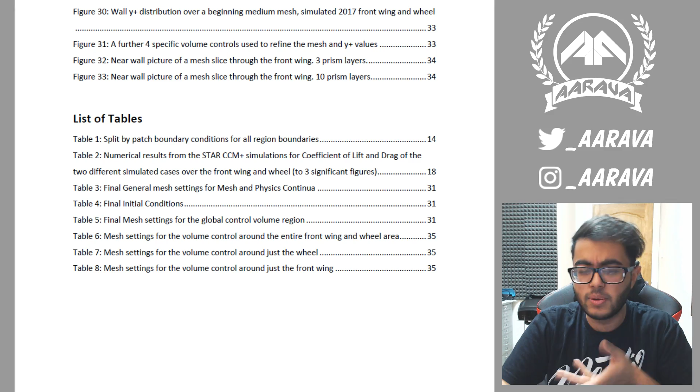The actual full literature review ended up being like 14 pages, which was its own separate document I had to hand in, I think last year, 2016, in November. So it was a very early hand-in for the literature review to be separate, and then this was handed in April 2017, which was an awesome month.

It was a big relief to hand it in, like print it off, 2 copies printed off, hand it in, there you go, bish bash bosh, the entire year kind of basically dusted off, apart from the exams, obviously.

But so the abstract just kind of sets out what the project was going to entail. So I said it was on Formula One. It didn't really actually specify what it was about. So basically, my project was on the 2017 aerodynamic regulations.

I wanted to compare the 2017 regulations to the 2016 one, because there was a lot of debate before this season kicked off, way back in January 2017, even in 2016, about the dirty air that this would cause. The new aero, it's going to be a nightmare for cars to follow, and to an extent, at some tracks it has been apparent, especially in the first race it was very apparent, but it's kind of leveled out and been okay in terms of dirty air.

But I wanted to compare that and see what was going on. Initially I wanted to look at the entire car, but then my supervisor, who was assigned to me for the entire year, said that was way too ambitious for a third-year degree, so he suggested I just look at one part of the car.

So I looked around, thought about maybe the rear end, maybe the side pod areas. In the end, I went for the front end, because the front end of these F1 cars now is so complex, so important for the rest of the car - anything that happens at the front goes towards the back. So I thought I would look at the front end and basically the interaction between the front wing and the tyres.

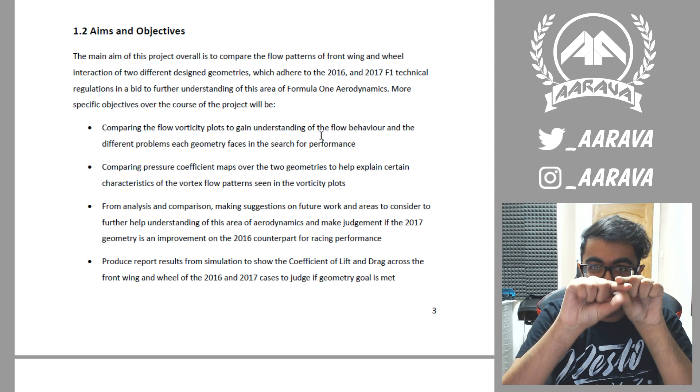There's just not a lot of research in terms of concrete journals about modern F1 cars. There's plenty about older spec F1 cars, like single element, literally plank-of-wood wings, but not a lot about the new rocket ship cars we've had for the last 10 years or so.

So aims and objectives, just setting out what I wanted to do. As I mentioned, comparing flow vorticity plots to gain an understanding of the flow behavior and the different problems each geometry faced. The geometries were a generic 2016 car and a generic 2017 car.

Those I purchased off a CAD website, designed by the same guy, giving him credit in the acknowledgement, and it was under fair use in terms of I'm using it for educational purposes.

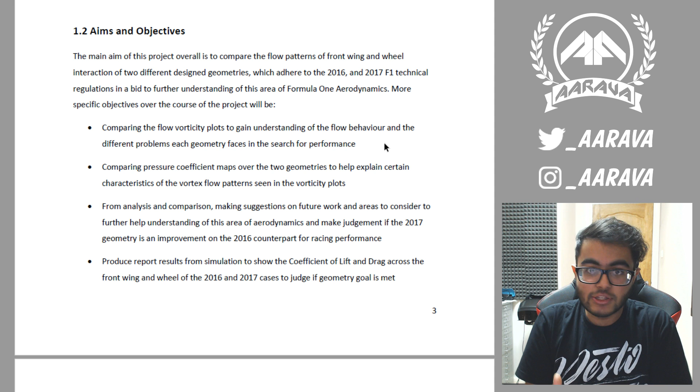So yeah, having the same designer make generic models for 2016 and 2017 gave me the best crossover of, okay, there's not too much outside design difference. It's the same designer, so in theory he should be designing it the same sort of way, so it was the best way to work in that aspect.

So generic geometries there - I think they're based very heavily off the FIA official videos that they gave.

It was the one available at my university. They have a mega kind of cluster computer hooked up to StarCCM, so that's why I chose that program compared to maybe other programs you might see other unis use or any other papers.

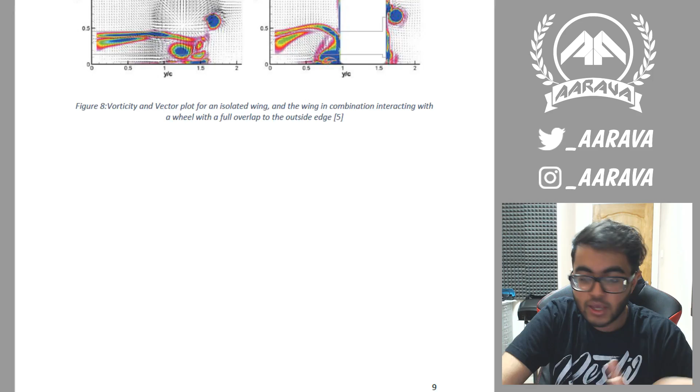So yeah, the introduction was just saying that, aims and objectives, as I was saying - flow vorticity, basically the plots, seeing where the air is swirling around, comparing the pressure coefficient maps over the two geometries to help explain certain aspects of the vortex.

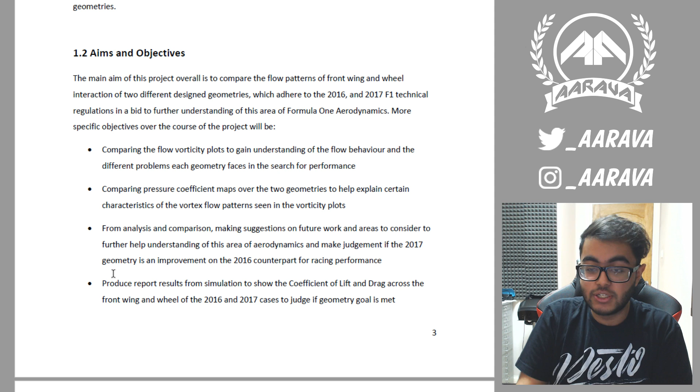So the pressure across the geometries can basically help explain and back up what we're seeing for the flow vortexes. Obviously the pressure is governing the physics of it, so that can help go in tandem with the vortex flow charts to help explain that.

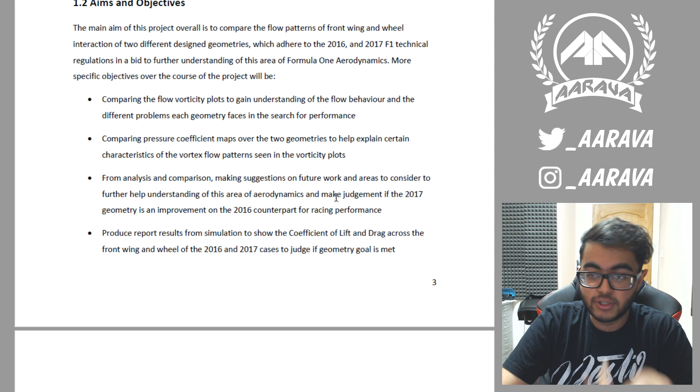And then these last two points are basically what I was mentioning about the conclusion: from analysis and comparison, make suggestions on future work and areas to consider to help further understanding of this area of aerodynamics, and then produce report results from simulations to show the coefficient of lift and drag.

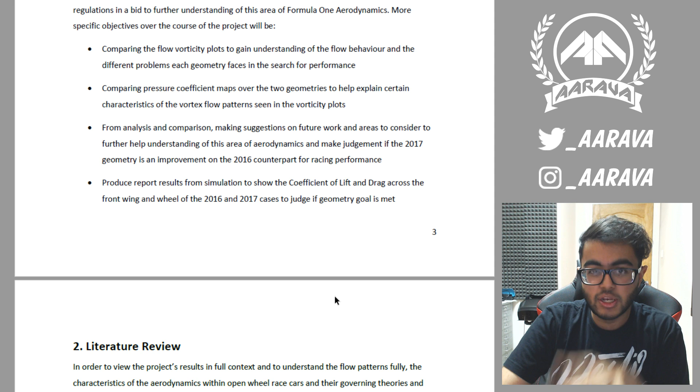So this was the smaller one, that's why it's the fourth point. Basically just a few numbers to compare coefficient of lift and drag. That was less important because the numbers won't matter too much, since it's obviously a third year report with two generic geometries. The numbers aren't going to be entirely accurate, whereas the actual pattern of the flow in the simulation may be pretty accurate, so that's why that's a smaller fourth point.

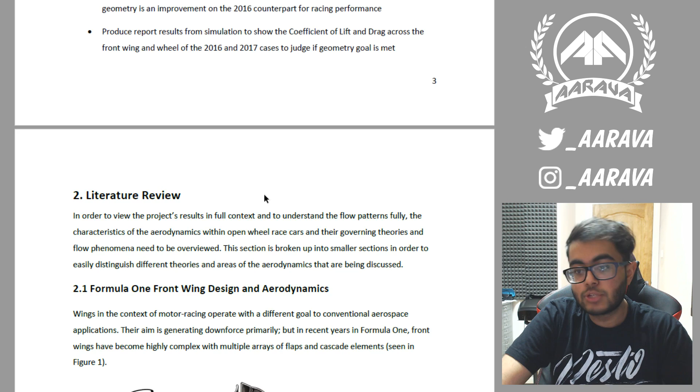So we go into the literature review. As I said, there is a bigger one that I did.

Right, so we're getting into the actual meat of the report, so I'm going to try my best to slow down the talk. I know I can talk quite fast. I'm not going to go into immense detail with everything because I just don't want the video to be too long and strung out.

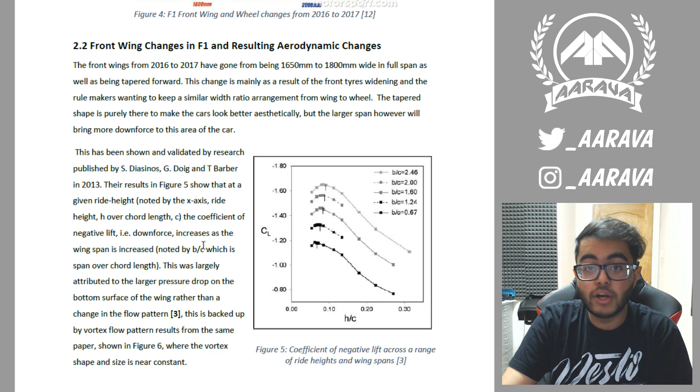So I'm going to rattle through this a little bit faster. We go through front wing changes in terms of just the span of the wing - obviously the wings got wider in 2017. So I wanted to look at a very base level what happens when you increase wings on race cars, showing that previous research has shown that if you increase the span, you are going to get more downforce.

The vortex itself, though, doesn't really change too much. You can see going from a shorter span to a longer span, the pattern hasn't changed too much. All that's kind of changed is this main vortex is elongated a little bit, stretched over. You can see the bleeding off of the vortex on the inside - this is the middle part of the wing, and this is the end plate. So moving to the inside, the bleeding off effect is a little bit longer, but apart from that, the actual shape itself is the same.

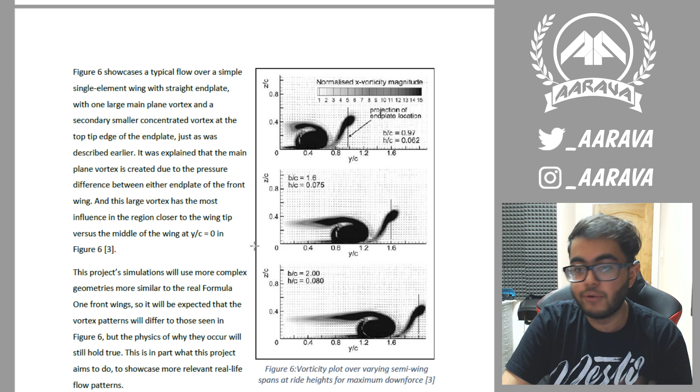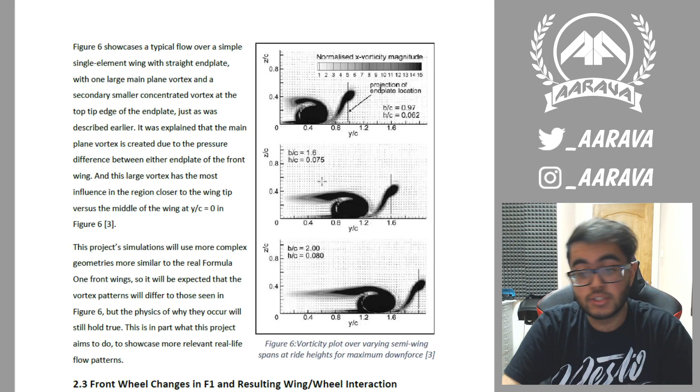But in terms of the actual data for the negative lift, the downforce you're creating, you would assume anyway that it would create more downforce, and it does - the research backs that up. So that was the wingspan section. You can see I've broken it up into F1 aerodynamics in general, and wingspan changes.

Then we go on to the actual interactions between wings and wheels. There's quite a bit of more recent research from 2012, 2013, 2014 into these interaction points. But again, through the literature review, you can see it's just a simple wing - this is the end plate here, then the wing, then the tire, very, very simple. But for a literature review, it was good because it gave a fundamental understanding and allowed me to show off that understanding before doing my own research and CFD simulations.

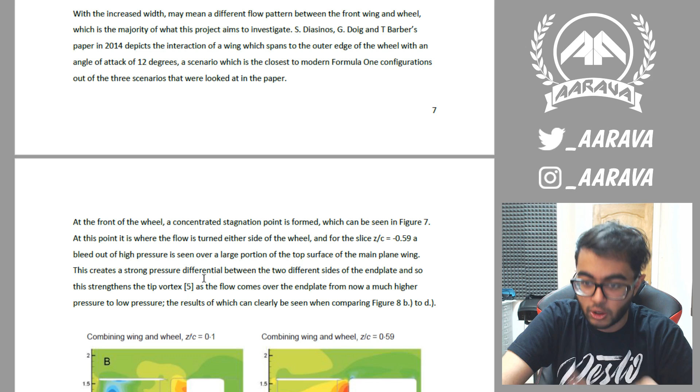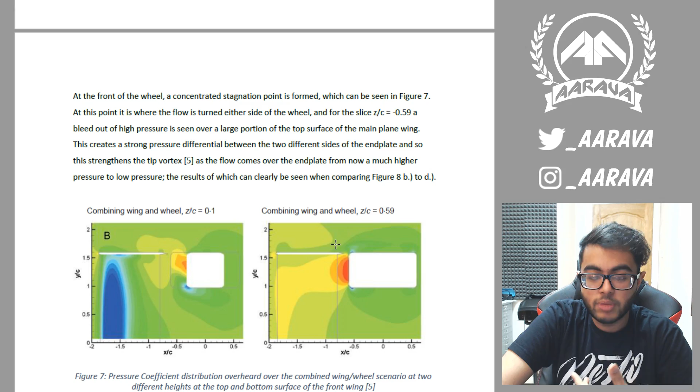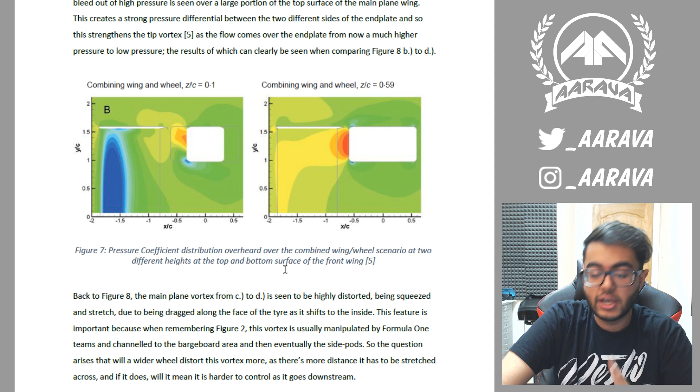So looking at the interactions and explaining those, these are basically the vortex plots that I'll be looking to reproduce later in this report. And this is the pressure coefficient plot, which I'll be looking to reproduce with my own data. These two were huge templates for me in terms of what I wanted to present - a good way to show, okay, I think this is the best way to present my data when I do it.

In terms of these simpler wheel-to-wing interactions, the main talking points: concentrated stagnation point at the front of the tire, and what that enables is a bleed over of higher pressure onto the actual wing. What that creates is a higher pressure differential between the inside of the end plate and the outside of the end plate. You can see here the difference - the darker green and lighter green is the difference in pressure, and because there's higher pressure now on the inside compared to the outside, the air will go from high to low pressure, and you can hopefully picture it in 3D terms.

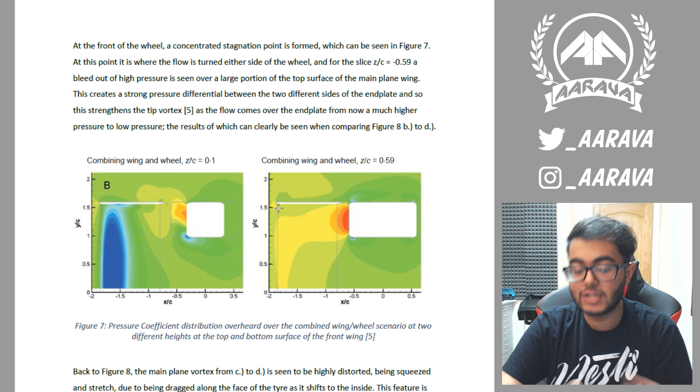High pressure here, low pressure here, the air is going to spiral over the end plate, and that's going to create an even stronger tip vortex going across. So that's how the wheel interaction will actually help the wing, in a sense.

Looking at the vorticity plots here, you can see this is the main kind of vortex, and you have this end plate vortex, which is going to get strengthened. You can see the difference when you go from this one to this one, the combined wing and wheel, compared to the isolated wing downstream - the vortex has grown larger.

It's a lot more rigid, more circular, more structured. So actually the wheel is helping that vortex be structured as it goes downstream, you would imagine, down towards the side pod basically.

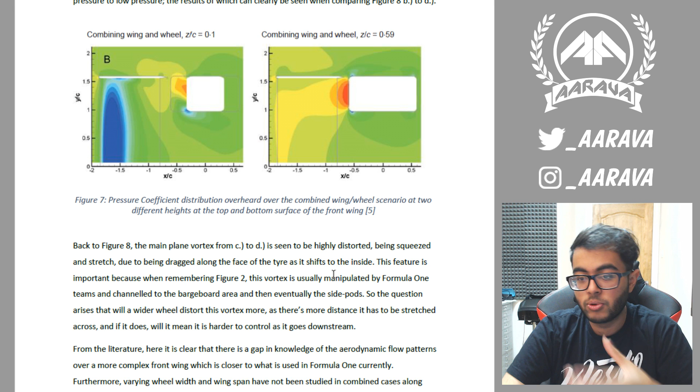And then the inside one gets shed a little bit. You can see it gets warped and kind of stretched from this cleaner inside vortex. So that's also one part that I pointed out I wanted to look at for my research.

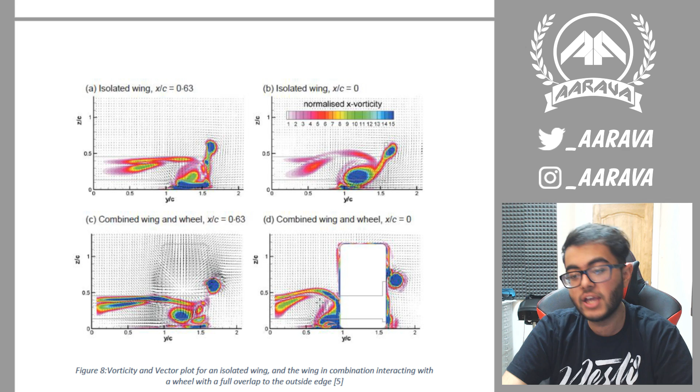In F1 that's going to get manipulated, just like we mentioned with the Mark Webber picture - that vortex is going to get manipulated. So the fact that it gets shed a little bit and warped in these simpler cases is a topic of interest.

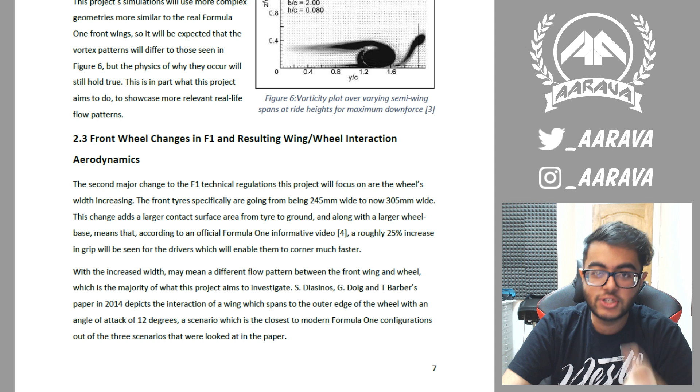Throughout the literature review, whilst you're reviewing the literature, the entire time you're basically going after every sentence: this is why I want to do some research about it, or this is what I'm gonna look at, or this is why it's a point of interest and why I'll be looking at it. So you're basically just justifying why you're doing the work you're going to do.

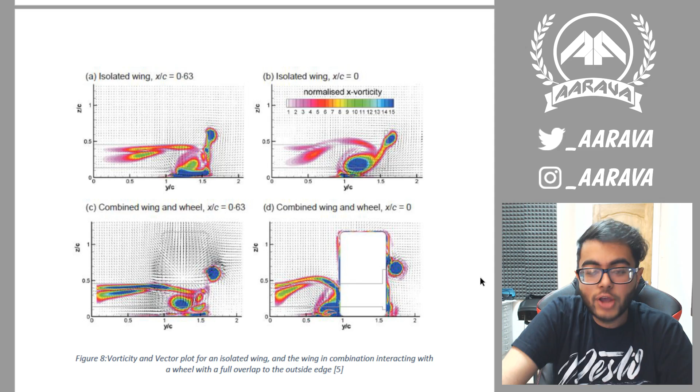If you don't have enough justification, it's kind of a weaker report, because then it's a way for the lecturer to question why you did this, what the point of it was. So you're just trying to suss that out.

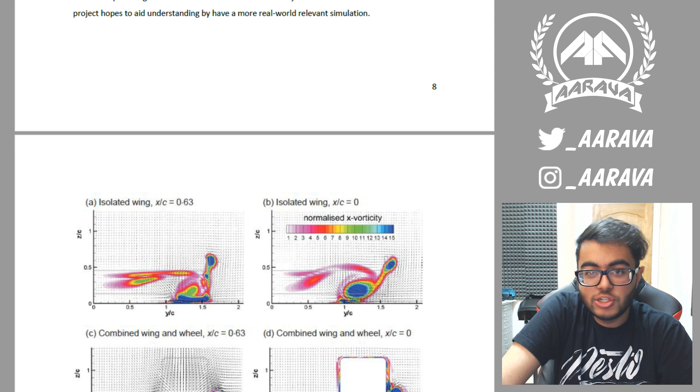For me, this topic was very good because, as I mentioned, there's not that much relevant research into modern F1 aero because it's all very secretive these days, and I guess a lot of people just aren't very interested in it. Across the entire UK, there's not a lot of very recent modern F1 scientific journals or reports out there.

So the entire time it was very easy to keep on saying, yes, we've got a simpler term, but what's going to happen on the more complex stuff?

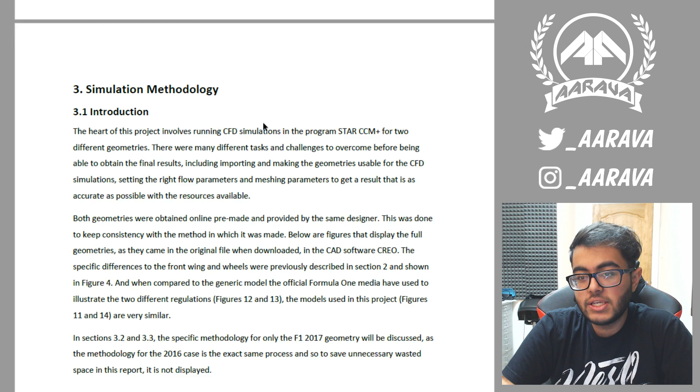So then we move on to the simulation methodology. This was basically just explaining how I was going to go about everything. As I said, this is the kind of generic geometry.

I opened it up into Creo, which is a CAD software, and then I'd splice it and cut it up and remove the suspension arms. I would remove the entire rear end - you can see it's just become a bluff body because I'm not interested in that.

All I'm interested in pretty much is this front wing to wheel interaction. After the wheel, I pretty much don't care about it because that's out of my jurisdiction - not something I'm going to look at because it's just too complicated for one individual project.

So just simplifying the geometry in Creo, opening up in StarCCM, which is the CFD software I've used. In StarCCM, and pretty much any CFD software, you create basically a control volume.

The control volume is basically like a virtual wind tunnel. You create an inlet, you create an outlet, you create walls, and you do a symmetry wall down the middle, because what you do actually to save computational time - these CFD simulations take a lot of number crunching.

You have to actually have a very good PC for it. And actually, in the end, the funny thing was, I did most of my simulations on this PC that I'm running this video on - my gaming PC, the one I use to game on, the one I use to do video editing on.

I did most of my simulations on this PC because it's a 6-core i7 processor, 32 gigabytes of RAM. So compared to your average student, the PC is very decent.

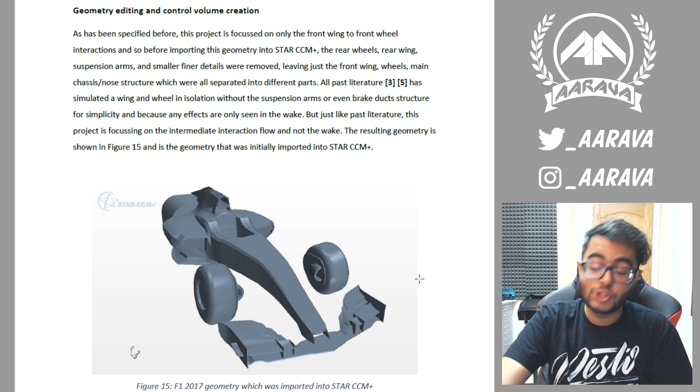So I actually did most of my simulations on my gaming PC. Who knew? Having a gaming PC and doing YouTube actually came in handy for the simulations, because I ended up running it mostly on my PC. It would take about 8 hours maybe on my PC, which is not too bad. I'd set it off and then just go relax, basically. But yeah, so to save computational power, that was the point I was on.

To save computational power, you do half the car and basically have a symmetrical line. So the line of symmetry runs down the entire half of the car, that's the nose, and you do a symmetry line down the middle through the entire car. To save computational power, because then in STAR CCM+ you can just flip the results and mirror them, so you've got a whole car worth of results, but you've only done half the work.

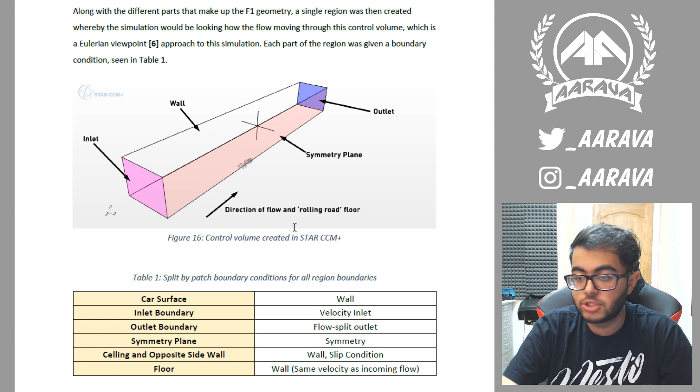So that's a good way to set up the control volume. You've got the direction of flow, rolling road simulation as well. So in terms of the car surface, I set that up as a wall. Obviously an inlet boundary, so the inlet is a velocity inlet, the outlet is a flow split outlet, and the symmetry is the symmetry plane there.

Then you've got the ceiling and the opposite wall, and those have a slip condition. So effectively that means the air is not going to get affected, it's not a boundary layer being created at that wall. So it's as if the wall is not there, but it is there, because we need to save computational power. We can't just simulate everything, the infinite air, so you have that control volume there, but you set it as a slip condition so it doesn't get affected.

And then the floor is a wall like the car surface with a boundary layer, but also at the same time we have the same velocity as the incoming flow to simulate a rolling road, because I don't want to simulate the car static, I need to simulate it moving. So instead of having the car move, I have the wall move, because that's the same thing in the simulation and in pretty much the entirety of engineering. You always look at the object as static, and you always just look at the air moving towards the object. So just like with the air at the inlet moving towards the car, you have the road moving this way.

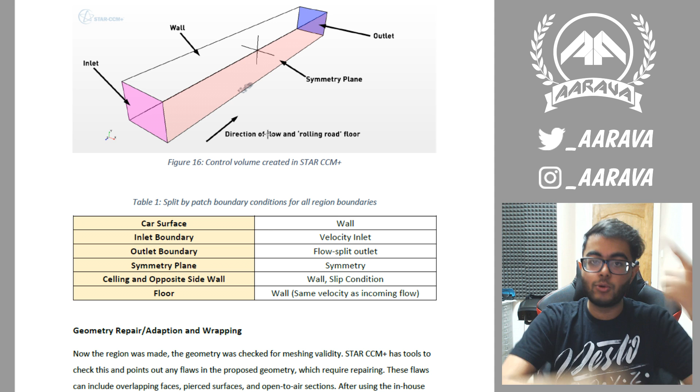And the same thing with the tires - I would set those up basically in the geometry. I could pinpoint the individual tire and tell the software, okay, I want the tire rotating backwards like this to simulate the tire moving across as it's driving. And that would also be at the same velocity as the air and the road.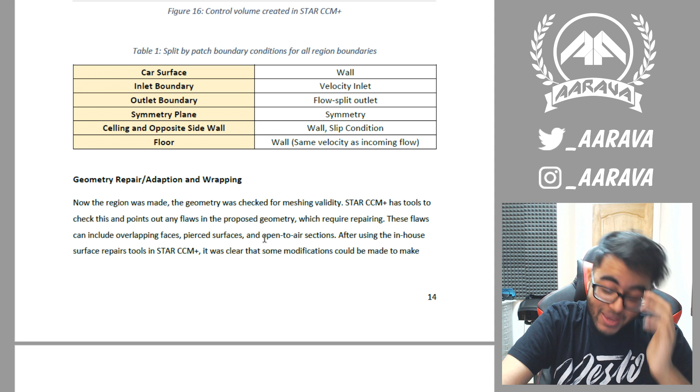So it wasn't as simple as just buying the geometry, opening it up in Creo, simplifying it, and putting it into StarCCM, and that was it. It just worked like magic. There were countless hours of repairing this geometry, adapting it, and then surface wrapping it, to try and get it as smooth as possible. The guy who designed it did a fabulous job, but at the end of the day it wasn't completely airtight as the simulation needed, and the more airtight and error-free you can get the geometry, the better for the simulation.

And then eventually you surface wrap it and surface mesh it. The best way I can explain it is like vacuum packing—you have the warm acrylic, you stamp it up over the object, then vacuum seal it and it creates a shape. That's basically what you're doing here. You're surface wrapping the entire car and creating a surface mesh from the geometry, and then on that surface mesh is where you create the volume mesh, which is the entire 3D mesh the simulation uses.

This was actually a large part of the project. Over the entire year, I'd say about 60%, or at least 50%, of the work was just getting the meshing and the numerical model all fine and how I wanted it. Especially the mesh had to be as good as possible.

The better mesh you have, the more accurate a mesh you have, the more accurate results you're going to have. Obviously there are limitations—it's a student third-year project, so that's something I brought up at the end of the conclusion as well, which is another big thing about these engineering reports: the entire time you also talk about errors and how you can improve it. It was a case of, yeah, this is accurate to a certain point. I'd like to, in hindsight, get it more accurate, but I don't have enough time. This is a third-year project, so I have to just accept the results as they are, and accept the mesh like this.

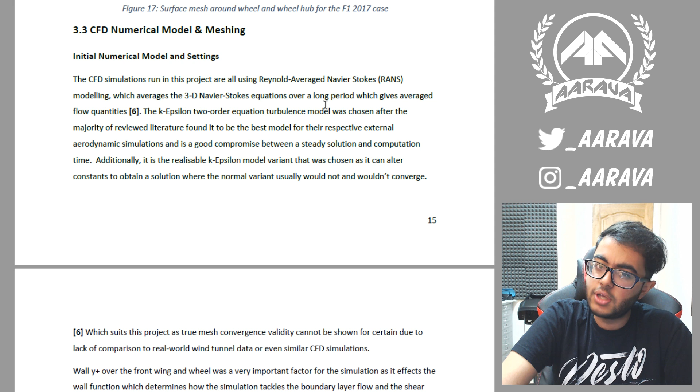In first year there were introductions to it in fluids lectures. In the CFD software, you just tick different boxes: okay, I want to use Reynolds-averaged Navier-Stokes equation modeling, which averages all the equations across a long amount of time, and then the 3D version of it, since we're looking at a 3D space, not 2D. The actual turbulence model itself is a K epsilon 2-order equation. Obviously you need a turbulence equation because this is not a smooth flow, it's a turbulent flow.

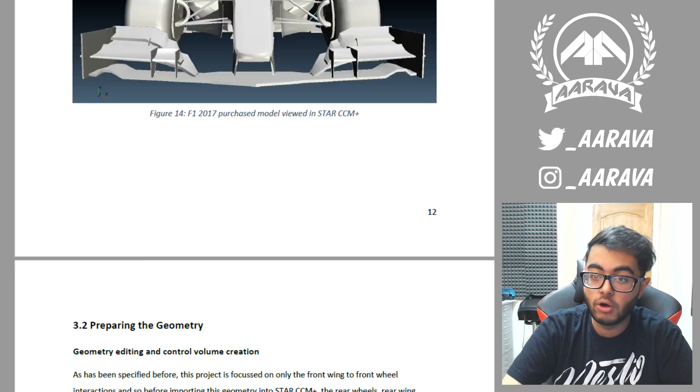There were other turbulence models my supervisor was suggesting. In the end, having looked at all my literature review stuff, I went with the K epsilon model because a lot of the more recent papers all use it, and it seemed to be the most accurate and the least fiddly, and also saved computational time, because it ended up being a good compromise between a steady solution and the time it saved for computation.

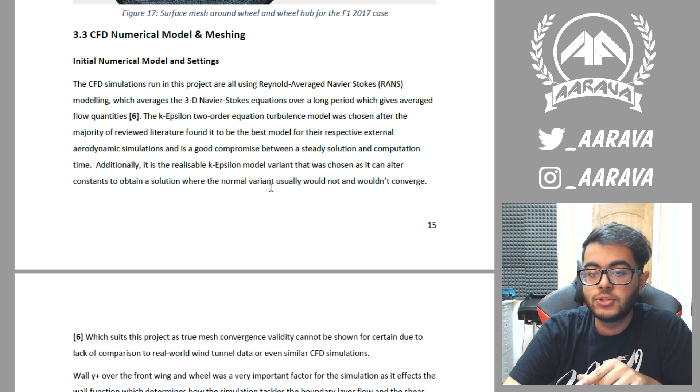Specifically, I was using something called the realizable K epsilon model variant, which was chosen to alter constants to obtain a solution where the normal variant could not. So when the software and the normal model can't figure out a solution for, say, a certain point on the mesh, it'll basically alter some of the constants and change some of the governing physics constants to obtain a result.

So it's like padding—it smooths it out. Instead of having a very jagged result, it tries to pad it out and smooth it. Basically it's a form of bodging a little bit, but it's a good way of smoothing out results when you know you don't have a perfect mesh, and that definitely was the case with my mesh—it wasn't an airtight perfect mesh, so it was needed in that sense.

And the goal with meshing, picking your model, and everything like that is to get something called mesh convergence. Mesh convergence is essentially—the best, basic way I could explain it—you need to get to the point where your mesh is accurate enough that if you were to increase the detail and complexity of the mesh, the actual general shape of your simulation data would not change that much.

It's not changing drastically. And when you get to a point of mesh convergence, you can actually start to simplify your mesh to the lowest denominator point, basically, to save computational power.

Ideally, also, hand in hand with mesh convergence goes comparing it to real-life data. So, F1 teams, that's why they have these aero rakes, and they'll do aero tests on the track, because that helps them realize if their CFD simulations are accurate. Especially in pre-season testing, they'll judge if their CFD simulations have worked out as they thought. In this case, obviously, I do not have a real-world example.

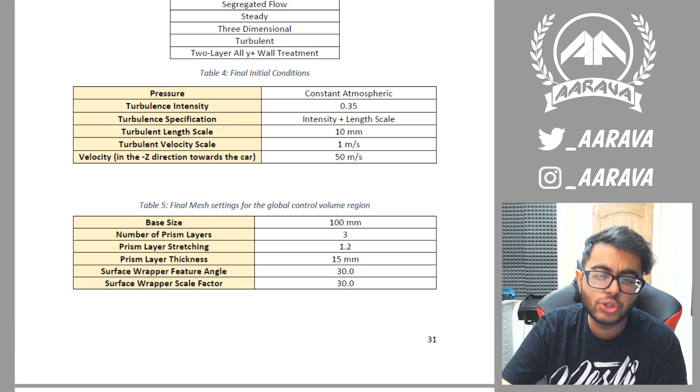I just have these two computer-designed geometries. So I had to take mesh convergence on a case of, okay, are the physics changing a lot? That's something I included in my appendix, because it wasn't crucial. It's good to show in the report, but it wasn't crucial to show.

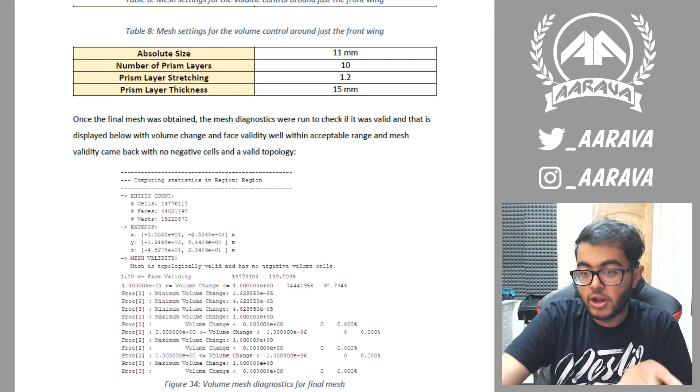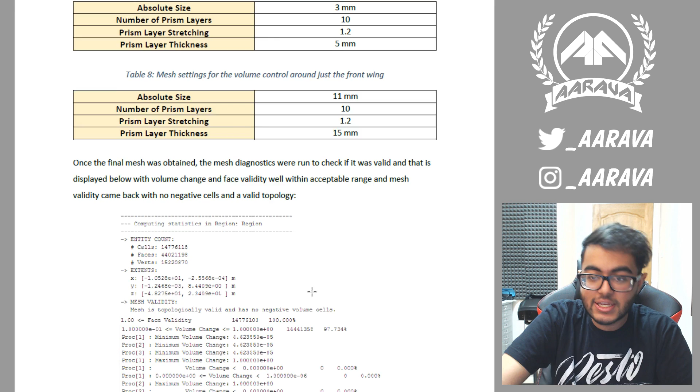So that suggests it's tending towards mesh convergence. And also using things like StarCCM's own tools to analyze your mesh - StarCCM will give you indications of your mesh validity, face validity, and volume change, and basically if you're within certain bands of percentages, you can say that mesh is good.

So the final thing on the mesh was also the Y plus value. Y plus is to do with the wall function, so it's part of the wall function equation.

Between 30 to 300 Y plus, there's a log layer where y plus equals u plus, which is the non-dimensional velocity. So I needed to try and get it in that kind of region for it to basically be a valid simulation.

And then obviously at stagnation points, naturally y plus is going to be very, very low at those points, because there's no air really moving at those points.

So that's pretty much it - little caveats of just looking at the physics conditions. Another cool point, I was able to actually use a real-life example of Sebastian Vettel's average speed at the Abu Dhabi Grand Prix in 2015, which was 54.1 meters per second. So that's how I determined to use 50 meters per second for the actual speed of the air moving in, and how much the tire was rotating and the road was rotating.

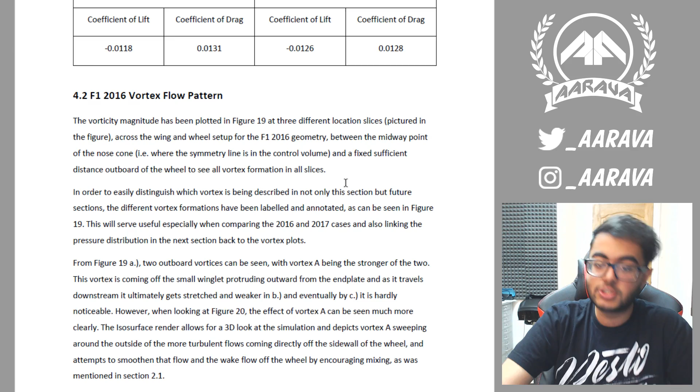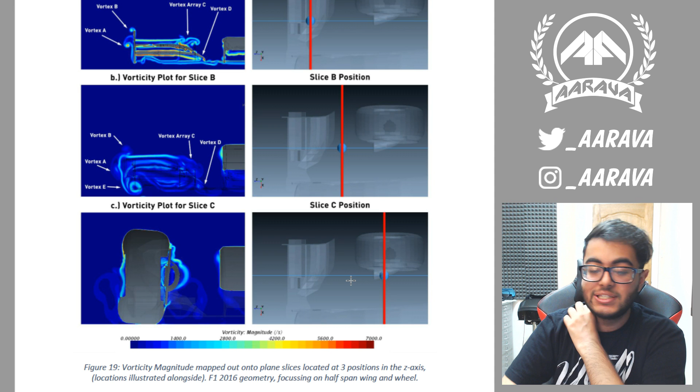More so, we get onto the vortex flow pattern. I've already gone into probably more detail than I wanted to on the mesh stuff, so I'm conscious of how rambly and long this video is getting. So, the flow pattern of the 2016 car is where I looked at first, because it's nice to go from the previous year to the next year.

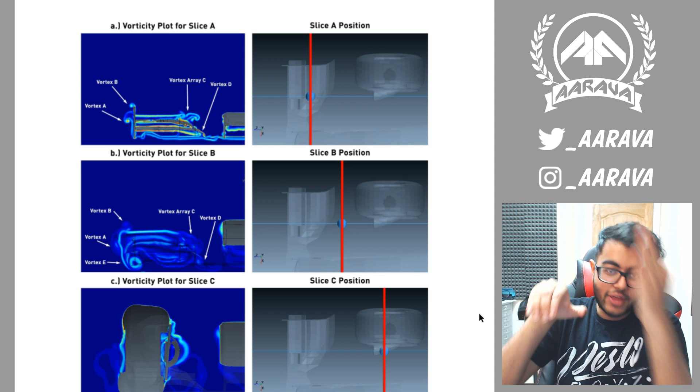The way I chose to display it was with slices of where I was looking. You have the entire simulation, and you think of it like a cake that you cut at a particular slice, and you open it up and look at that slice. So I've shown what part I'm looking at: here we're in the middle of the wing, here we're just after the wing, and here we're at the first quarter of the tire.

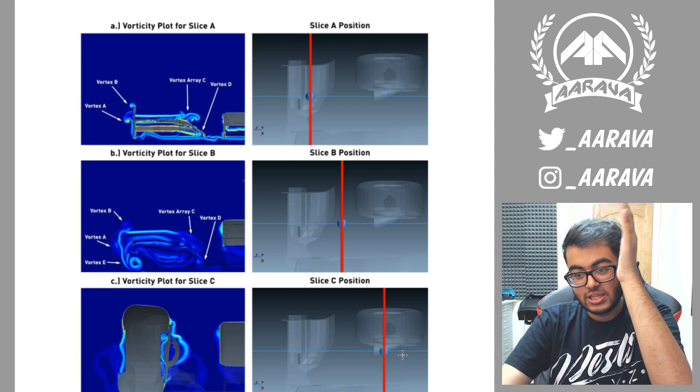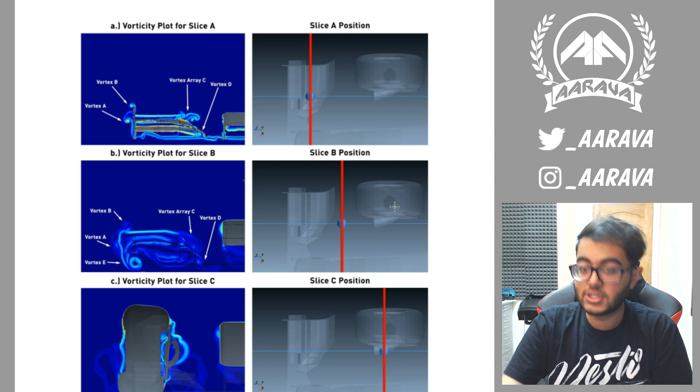This is actually another point where other skills came in handy for me, because I was able to use Photoshop quite proficiently to make this graphic. These screenshots are from Star CCM, but the annotations, the slice points, and the way I've set it out is all done in Photoshop, then imported back into the Word file. That came in handy for annotating, so instead of just talking about each vortex, I was able to go, right, Vortex A, Vortex B, Vortex C, Vortex D — it was the easiest way to talk about everything.

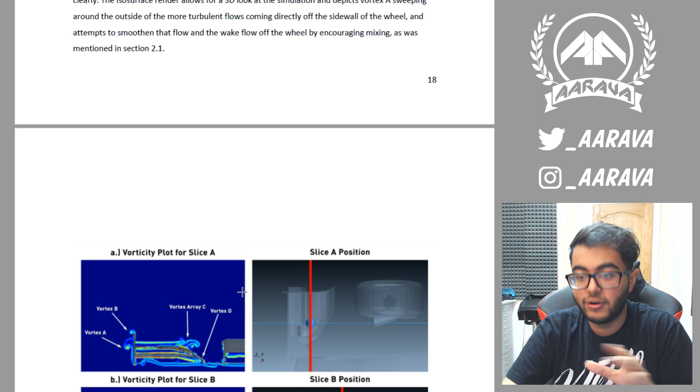So compared to the literature review, this vortex plot is a lot more complicated now. We've got not only one tip vortex and one main plane vortex, but two little tip vortexes here, two other inward vortexes, and at the actual winglets, because we've got so many flaps, there's almost no main plane vortex visible until we get behind the wing, where you can now see the main plane vortex. But ahead of that, in the middle of the wing, there's just a lot of interaction with the wing itself, so it doesn't look much like the simple literature review stuff.

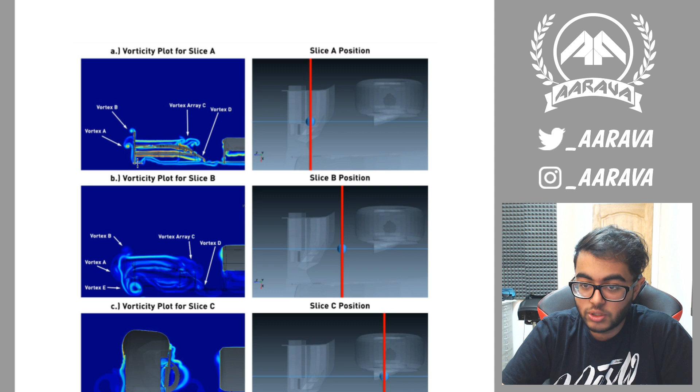But you can see very clearly the two tip vortexes spiral out nicely, and as you go downstream they get a little weaker. You can see a fifth vortex, Vortex E, comes into play, caused by this little upwards dip of the wing itself — that's essentially the main plane vortex. Then you can see the actual tire itself, faintly, these lighter blue areas where the vortex is eventually getting shed, and that's where the air is interacting with the tire.

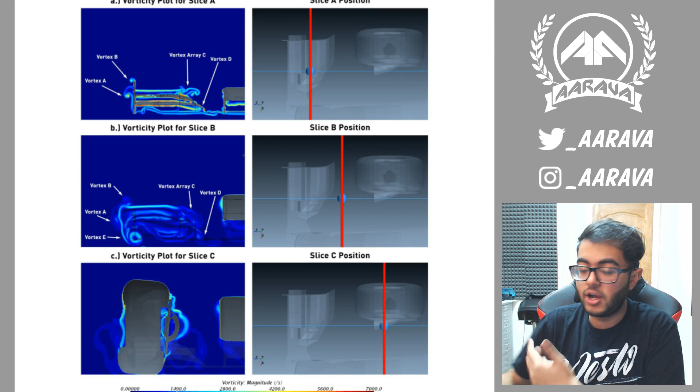A better way to illustrate it for you guys in the video is using isosurfaces. Isosurface renders of the vorticity were very handy, because now you can clearly see it like an animation of Vortex A and Vortex B. If I go back to this, that's Vortex A, that's Vortex B — the surface renders now clearly show in a much better way what is happening here.

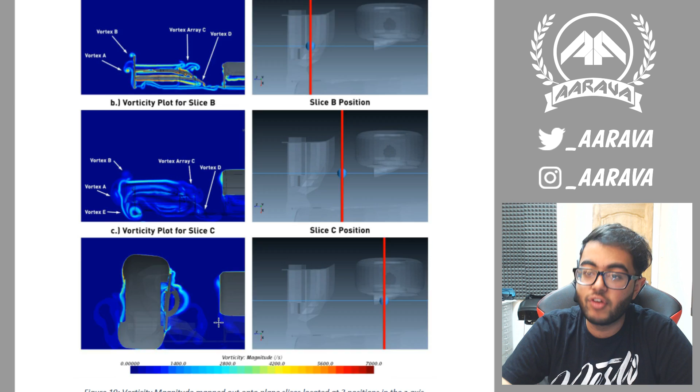These are two kind of inward ones, and you can see them now on this isosurface, and you can see very nicely how they wrap around the inside of the tire, and they go towards this little area of the side pod. So this was a big part of comparing 2016 to 2017, because you'll see a little bit later, 2017, the vortexes end up being so much more concrete and more uniform and neat to the inside.

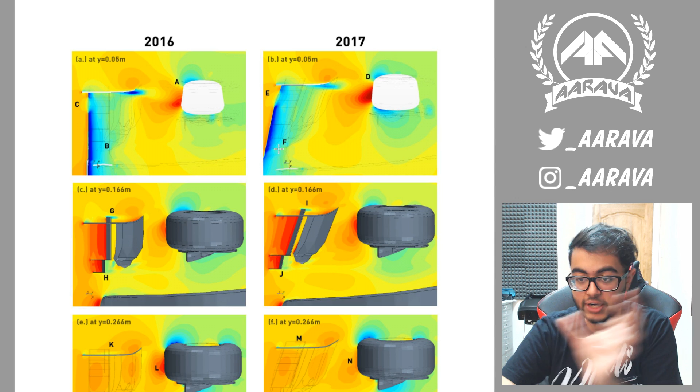So it really did show how much of a benefit the 2017 Aero was going to be. Pressure plots over the geometry. So like we saw in the literature review, I did a pressure plot from the bird's eye view. Basically, you can see in this graphic, I used screenshots from Star CCM, but then used Photoshop to really nicely demonstrate each of the kind of slices I was looking at. And so we're going from different slices of different heights.

So this is like the lowest height, this is below the wing. Then we go to about halfway through the wing, and then we go to just above the wing where we're cutting the tire, basically. And as we go along those different slices, you can see the different points of the stagnation point of the tire, the point on top of the wing. You've got this high pressure, you've got this low pressure underneath the wing. You can see the difference here, just like we saw with the literature review. This was a very good point of confirming that my research is somewhat accurate, because it really went in the same pattern as literature review.

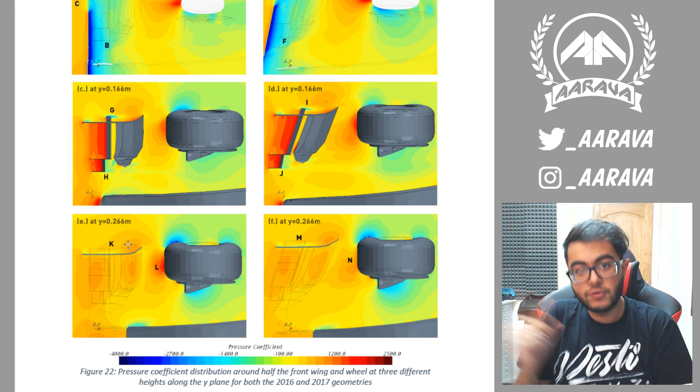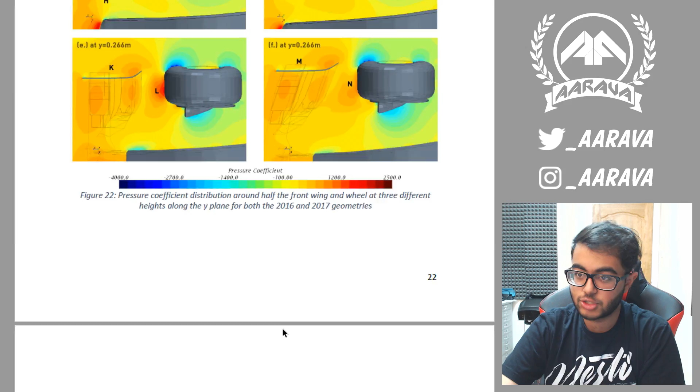You can see high pressure on this side of the end plate, and then lower pressure on the other side of the end plate, and so that kind of backs up with what we've seen in the literature review of why and how the air is going to move around over the end plate tip. But basically just going through this entire text explaining why you're seeing what we're seeing in these vortex diagrams, these vortex plots, basically just showing, okay, so at this point the pressure is doing this, so that's why this is happening. So the structure is basically 2016, the vortex, pressure for 2016 and 2017, then the 2017 vortex, and so that was the best way I thought it would set out, and in the end, clearly, my lecturers thought it was the best way to set it out as well.

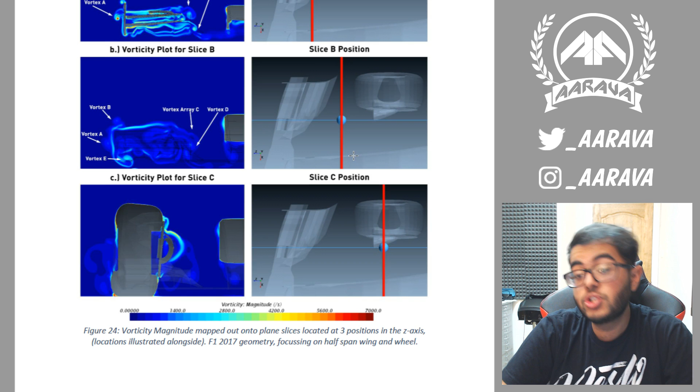So this is 2017 now. You can see Vortex A is a lot stronger. There's now a larger red dot there. Vortex B is pretty much the same. Vortex C and D are so much stronger now. You can see so much more of a circular pattern on this vortex chart compared to 2016. You can see it's very kind of wishy-washy, very kind of warped. 2017 is so much more structured.

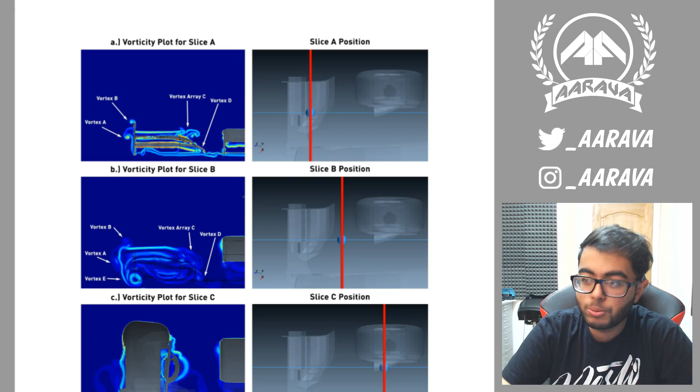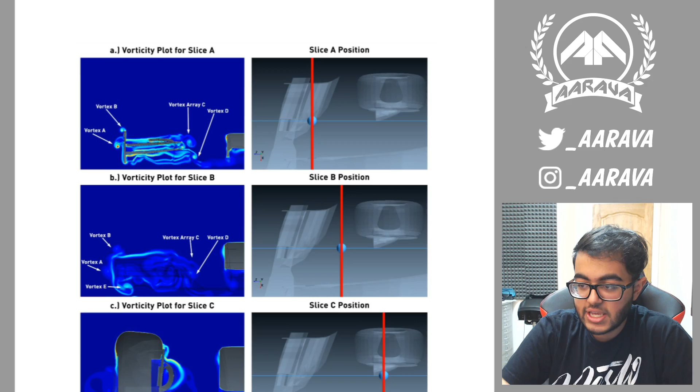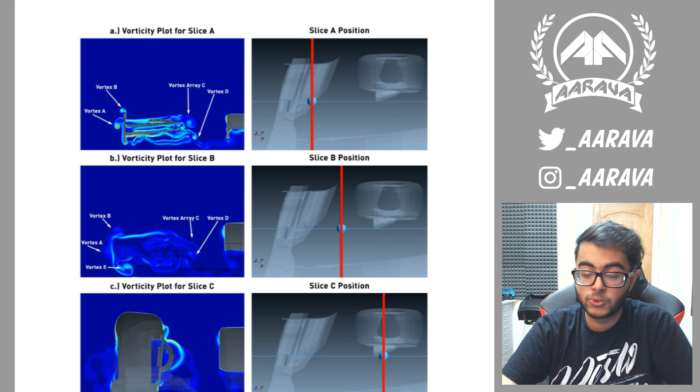And so now, also you can see Vortex E. It's not very apparent on this slice here, but you can see Vortex E is there again. Now, Vortex E, it looks more prominent on 2016's one because it's more of a larger circle, but in reality, that actually is a less concentrated vortex, because it's a very large circle that's kind of spread out with this large pocket in between where there's no kind of strong vorticity, whereas this is a stronger vortex, and it's shown a lot more in the isosurface render, where now you can see Vortex A and B, and you can see Vortex C. And so you now have got three different vortexes coming off the side of that end plate, helping smoothen out flow as we go downstream to the turbulent side of the tire.

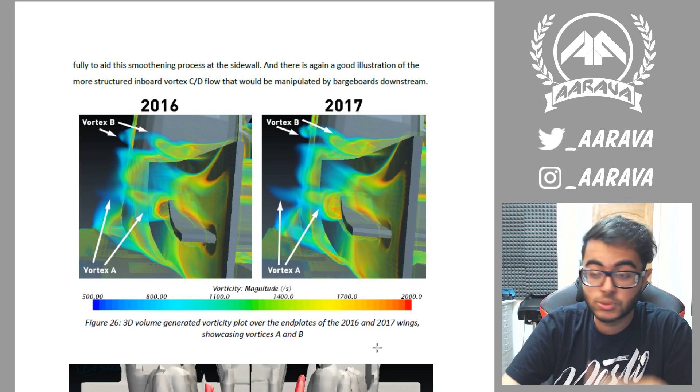And again here, just kind of talking through that, using the pressure points, and then we get to comparing 2016 and 2017 very kind of directly now. We're not on separate pages. We're on 2016's here, 2017's here, and so this is a 3D volume generated vorticity plot. So it's effectively, if I go back to this, it's basically this, but rendered out in 3D, in a 3D space. So you can see, it's basically a way to see this isosurface, but you can also see the actual magnitude of the vorticity in terms of the colors.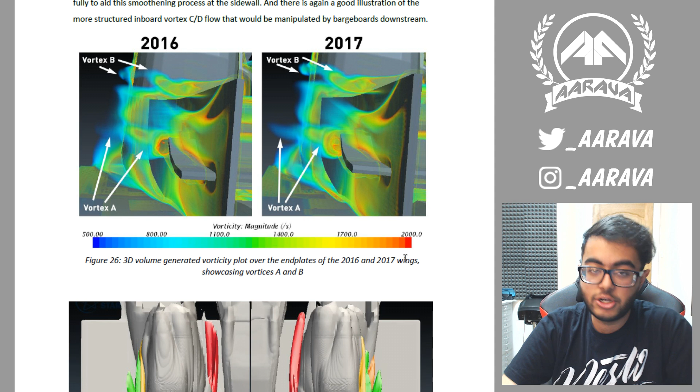And you can see here comparing, this is Vortex A essentially, and you can see 2017 to 2016, you can see here very faintly, but obviously the arrows hopefully are going to help you guys out to see that. You can see the vortex is extended so much further downstream in 2017 than it ever did in 2016. And the same thing can be said for Vortex B, and it's a lot more concentrated towards the end here, where it's starting to meet the sidewall of the tire compared to 2016.

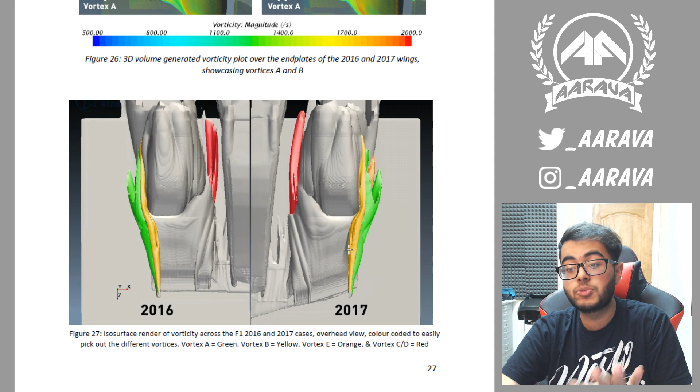And then we've got the isosurface on an overhead view. Again, I use Photoshop to color coordinate everything. We've got the different vortexes: Vortex A in green, Vortex B in yellow, red is Vortex C/D, and Vortex E is in orange.

In 2016, you can't even see Vortex E. You can just about pick it out here in 2017, and you can clearly see Vortex C and D being so much more structured and more uniform in 2017 than in 2016. It's been shed and warped a lot more.

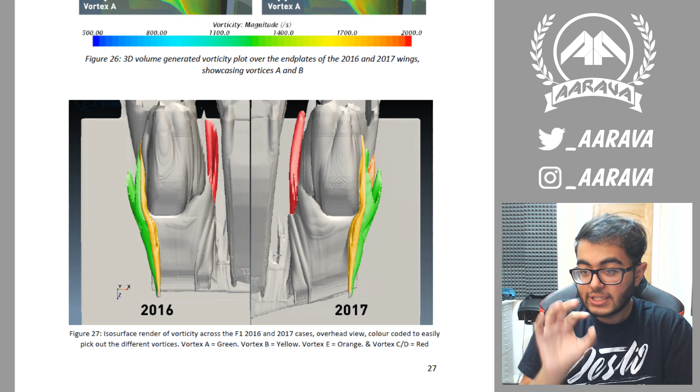That was a really great point for me to get out of the simulation, because obviously the regulations in 2017 did open up naturally for the teams to exploit the bargeboard area a lot more, so they would do that anyway, but it backed up the point of why they would do it and why you're seeing so much development in the bargeboard area, because now the vortex going towards that area is so much more structured than it was the previous year.

And in terms of looking at how the air would be affected with the wider tire, the argument here is because of the wider wing, essentially, and the more aggressive aero on the 2017 wings, although yes the tire is wider, the 2017 wing actually does a really fabulous job at getting a lot of the air around that tire and to this pinpoint place where the engineers want the air to go to help smoothen out the tire flow as they go towards the side pod.

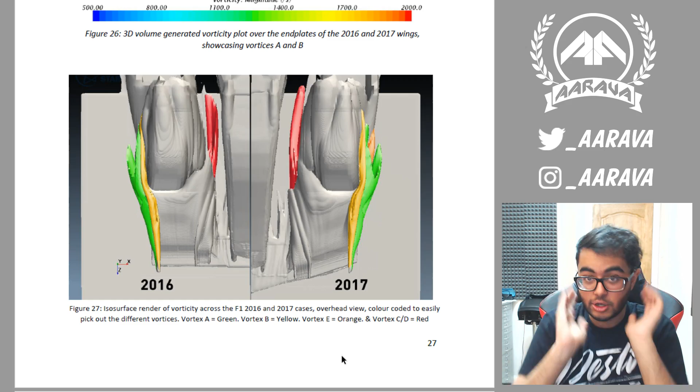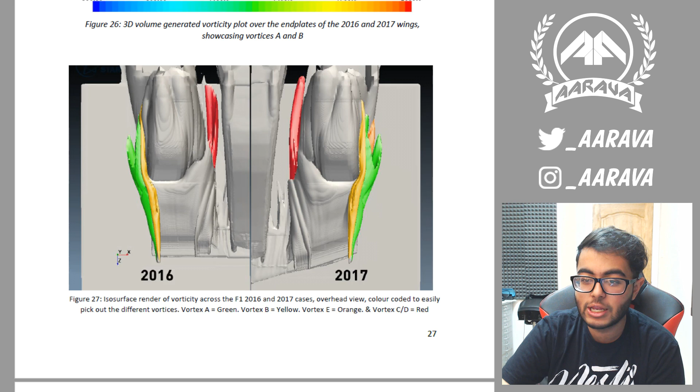So that's pretty much all of the actual main chunk of the work. Hopefully that was somewhat interesting and understandable. I probably lost a lot of you at this point. As much as I want to say I'm trying my best to talk slow, I know I do talk naturally quite fast anyway. When I'm passionate about a topic, I just kind of talk about it very, very fast. Definitely for sure, I'm not going to be a lecturer anytime soon.

But as I mentioned, a large part of the ending of the report, and a lot of engineering reports in general - that's definitely a tip for anyone in lower years - for the third year report, make sure you have a decent amount to talk about future work, because they want you to give suggestions on what you would suggest other people to do in later years.

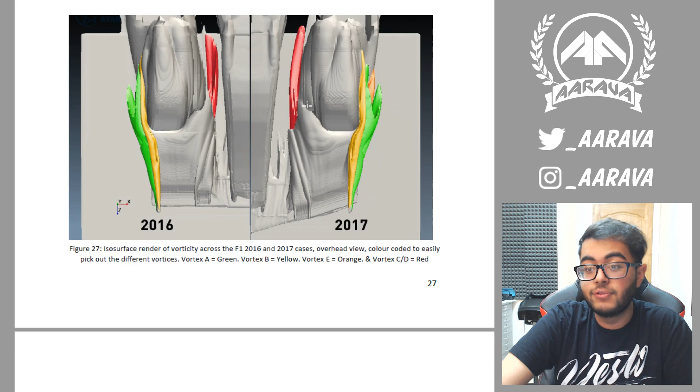So I mentioned stuff like, you could look at the actual bargeboard area, because we can now see the vortex is a lot better towards that bargeboard area, so what's going to go on then? Do a simulation downstream of the car. And also I talk about the limitations of using my PC at home - if I had used my university's high-powered computer, maybe I could have done more of the bargeboard area, and maybe I could have gotten more accurate data because I could have done an even finer mesh perhaps.

And so the conclusions were basically summing up and giving the opinions on what is coming from this data, basically what I think this all means.

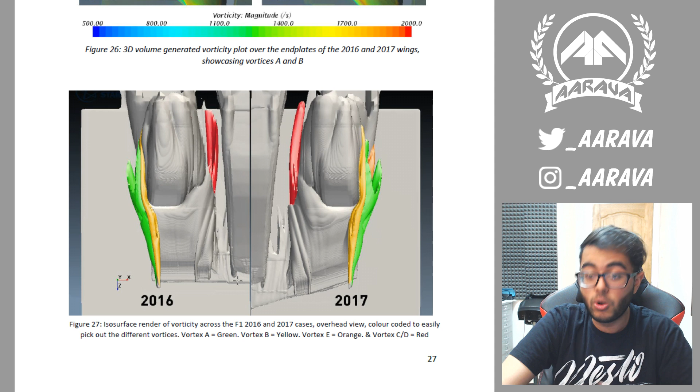And what you can clearly see in the 2017 cars is a much faster car, a much more aggressive car, a much better job at cleaning air up on the side of the tires, and a lot more structured vortexes, which the engineers can now manipulate a lot more. So that's why we're seeing so much more aerodynamic updates on the cars around the bargeboard area to the side pod area, because the vortexes now coming downstream from the front wing are so much better than the 2016 aero.

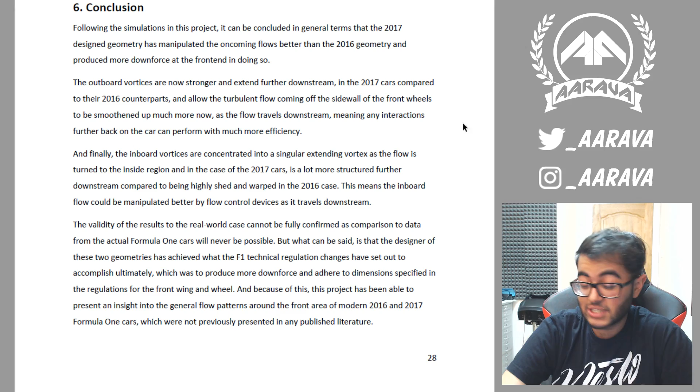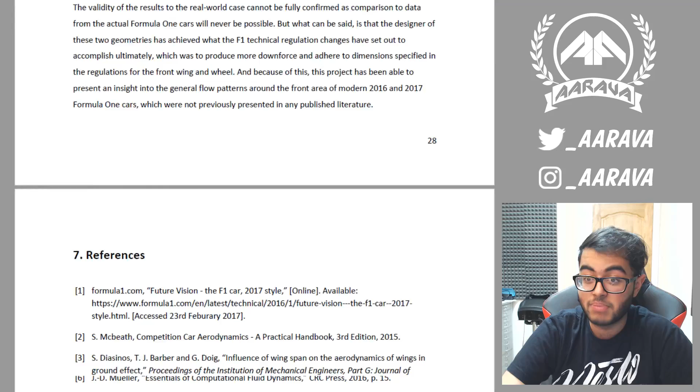And then, as usual, the bane of every student's existence: references. I actually didn't have too many - about 15 in total, because as I said, the literature review showed there wasn't actually too much previous research, so there was a lot of linking back and referencing pretty much one or two major papers from specific people. Then the appendix was just giving out the specific mesh models, showcasing the refinement.

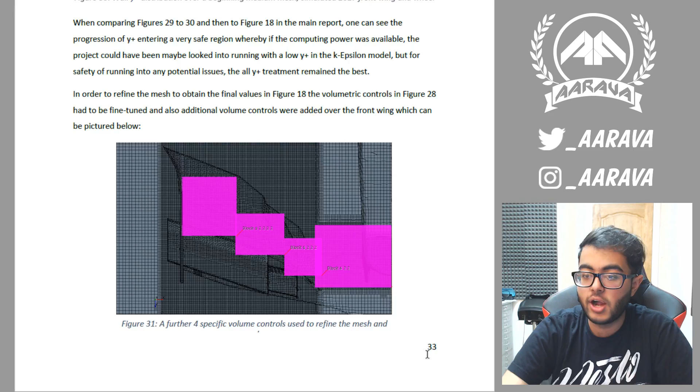These were the different control volumes for the meshing. So I've got a base control volume, a control volume over the wing, the wheel, to fine-tune the mesh, and then, as I showed before, the wall Y plus. Prism layer thickness was important too - I didn't mention that before, but it's also quite important in the meshing phase. Getting that thickness right is very crucial in terms of how close to the wall the simulation is going to simulate that boundary layer flow.

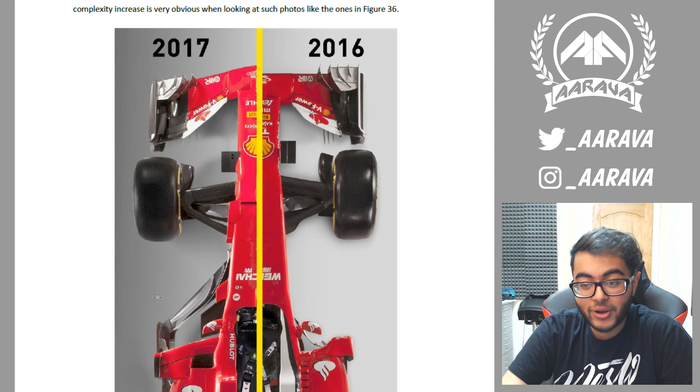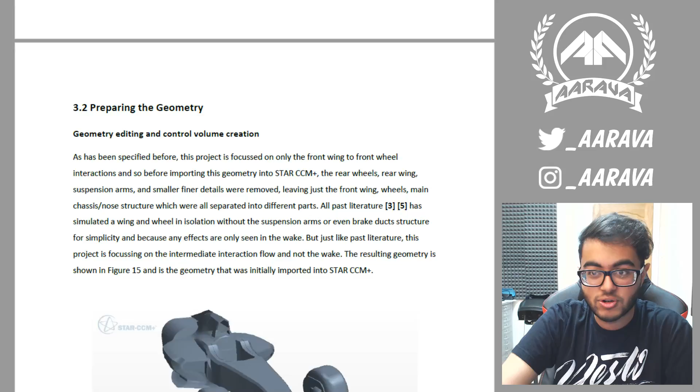And then it was kind of cool to round out the appendix with the Ferrari car—this was very minor, that's why it was in the appendix—but this was basically me showing off the difference between the 2016 and 2017 car. You can clearly see why there's a lot more going on here, because the vortex going through here is a lot better than the one going through here. That was more for me. I didn't have to include this Appendix B, but it was kind of cool for me to actually use real world, very modern F1 examples in a university report, because from first year I was really quite scared I wasn't going to be able to passionately research and talk about F1 the way I wanted to throughout my degree, and finally in the third year report, I was able to.

But yeah, that has been it. The recording's been over an hour, I don't know how long it's going to be when I cut down the video. I did mention at the very start it was going to be a very rambly video, so there's probably going to be like 5 people at this point still watching.